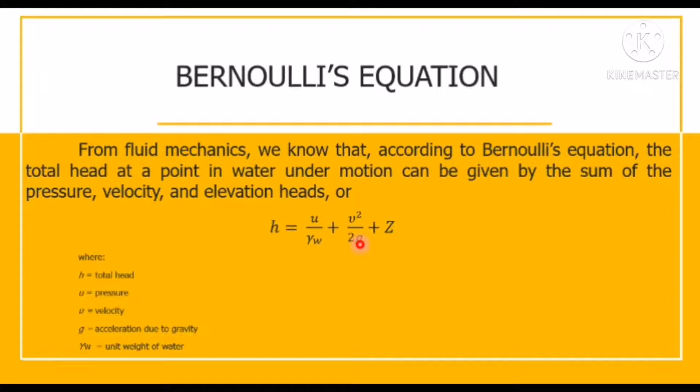This U over unit weight of water is called the pressure head. V squared over 2G here is equal to the velocity head, and Z is the elevation head.

If Bernoulli's equation is applied to the flow of water through a porous soil medium, the term containing the velocity head can be neglected because the seepage velocity is small, and the total head at any point can be adequately represented by H equals U over unit weight of water plus Z, or the elevation head, because the velocity head was already neglected in the equation.

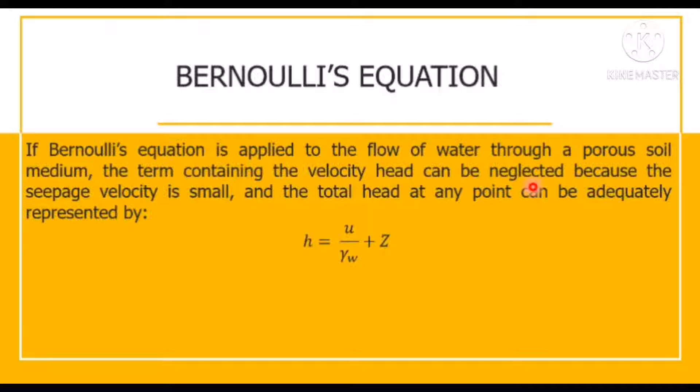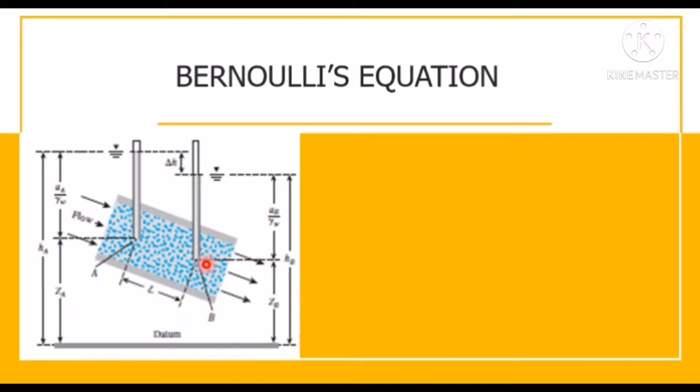In order for us to understand more about Bernoulli's equation, here is an illustration about two points wherein there's a flow of water, and the loss between two points A and B can be given by change in H equals H sub A minus H sub B. So the difference between this water level here and the water level at point B is equal to change in H.

This has elevation HA and HB. That's why the difference between HA and HB is equal to the change in H, or it is also equal to the pressure head at point A plus the elevation head at point A, minus the quantity of the pressure head at point B plus the elevation head at point B.

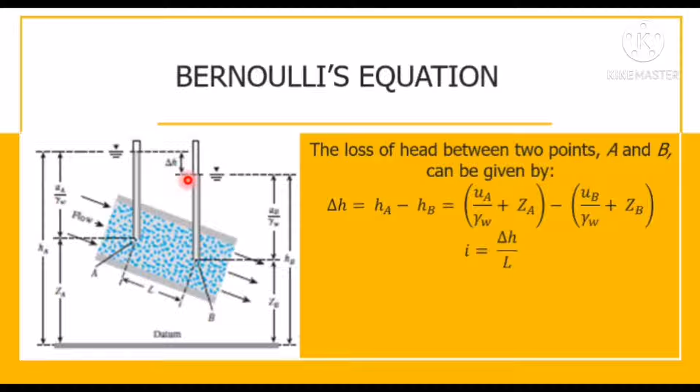This Bernoulli's equation also introduced the concept of what we call the hydraulic gradient. So hydraulic gradient, or I, is equal to change in H, or the change in elevation of two water levels, all over the length, or the soil length between points A and B. That is the distance between points A and B, the length of flow over which the loss of head occurred, because we are getting the change in H between points A and B, and that would be L.

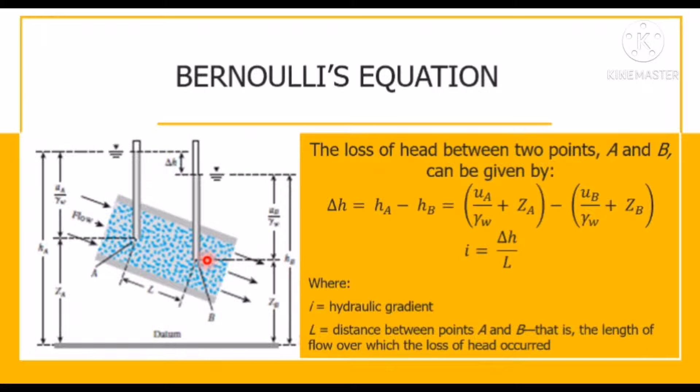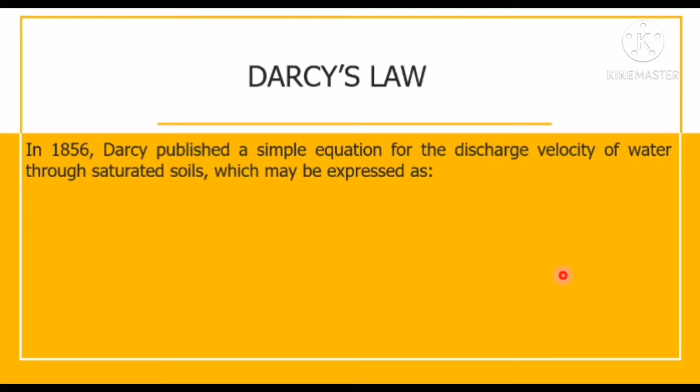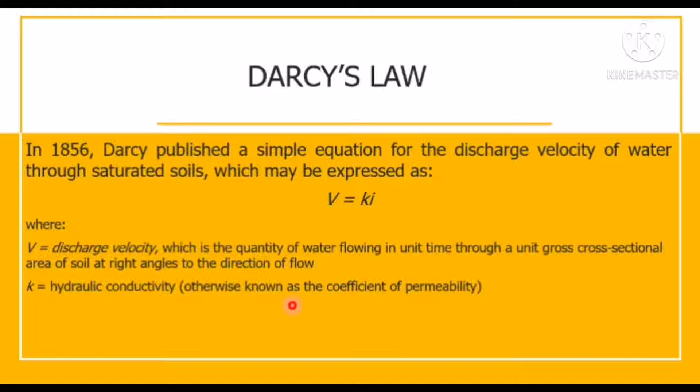The concept of permeability also started from Darcy's law. In 1856, Darcy published a simple equation for the discharge velocity of water through saturated soils, which may be expressed as V equals Ki, where V is the discharge velocity, which is the quantity of water flowing in unit time through a unit gross cross-sectional area of soil at right angles to the direction of flow. K is what we call the hydraulic conductivity, or otherwise known as the coefficient of permeability, and I is what we call the hydraulic gradient, or equal to change in H over L.

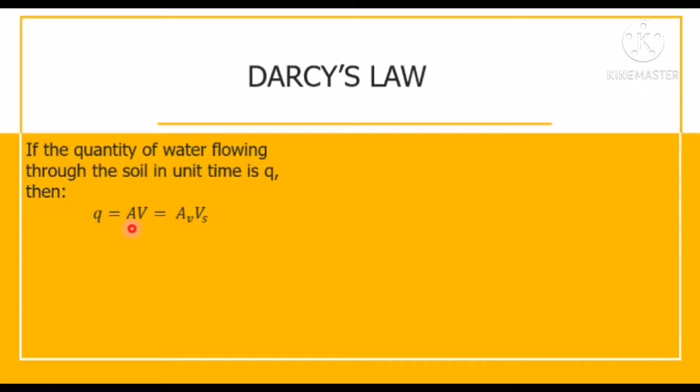If the quantity of water flowing through the soil in unit time is Q, then we know that Q is equal to the area times the velocity, or it is also equal to A times Vs, where Vs is equal to the seepage velocity, and Av is the area of void in the cross-section of the specimen.

Therefore, A is equal to Av plus As. We know that the total area of soil is equal to the area of voids plus the total area of soil particles, or soil solids. If we substitute it in the equation Q equals AV, we substitute the value of A, it will be equal to V multiplied by the quantity Av plus As, equals Av times Vs. So in this equation, we substituted the value of A, and that's why it became like this.

And then, if we transpose the values and get the value of Vs or the seepage velocity, it will be equal to velocity or the discharge velocity multiplied by area of the voids plus area of soil solids, all over area of voids. And if we multiply both numerator and denominator by the length of the soil, it will be equal to the volume, because area times length is equal to volume. So Vs will be equal to V times the volume of voids plus volume of soil solids, all over volume of voids.

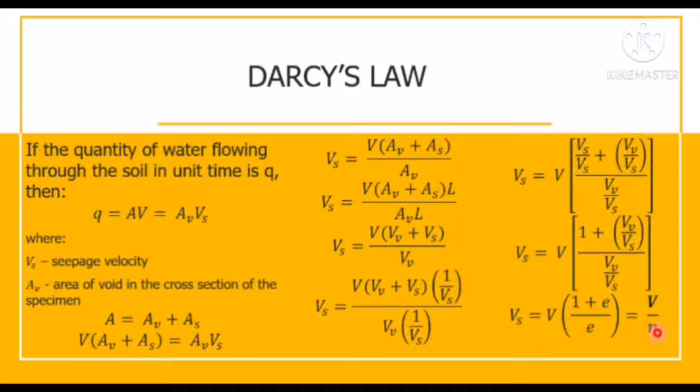In permeability, we have what we call the hydraulic conductivity. In order for us to understand more about permeability, we should know more about hydraulic conductivity, or what we call the coefficient of permeability. Hydraulic conductivity is generally expressed in centimeters per second, or meter per second in SI units. Hydraulic conductivity of soils depends on several factors.

Number one, it depends on fluid viscosity. Why? Because the more viscous the fluid, the harder it is for it to flow through soils.

Also, number two, pore size distribution. The larger the pore size, the easier it is for water to flow through soils. The smaller the pore sizes of the soil, the slower the water will flow through it.

And also, number three, grain size distribution. Why is it a factor that affects the hydraulic conductivity of soils? If we compare gravel to clay, and let water flow through them, the water flows faster in gravel than in clay, because the larger the grain sizes, the larger also the spaces between its particles. That's why water flows faster through gravel than through clay, whose particles are very small, compacted, and stuck together, so the spaces between them are small. So the water flows slower through clay.

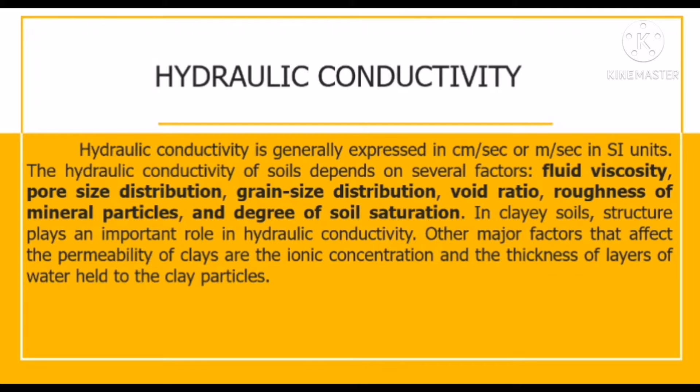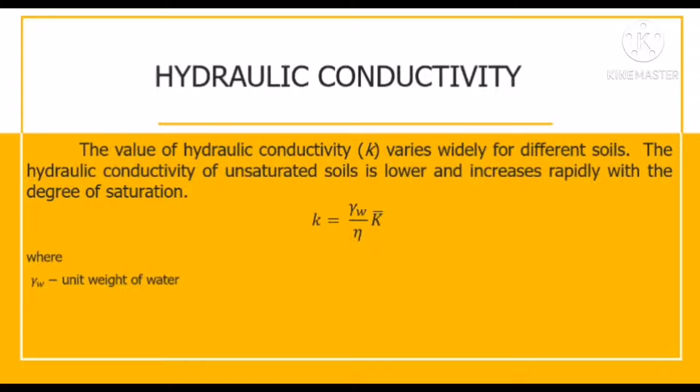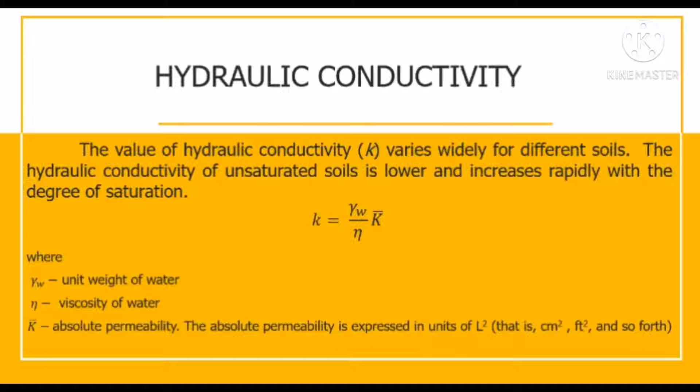The value of hydraulic conductivity varies widely for different soils. The hydraulic conductivity of unsaturated soils is lower and increases rapidly with the degree of saturation, as I said earlier. K is equal to the unit weight of water, gamma sub W, divided by eta, multiplied by K bar, where gamma sub W is the unit weight of water, eta is the viscosity of water, and K bar is the absolute permeability, expressed in L squared, or centimeter squared, feet squared, and so on.

Hydraulic conductivity differs depending on the type of soil. This is a table representing the typical values of hydraulic conductivity of saturated soils, where the range of hydraulic conductivity or coefficient of permeability depends on the type of soil. If the soil type is clean gravel, the coefficient of permeability is definitely higher, ranging from 1 to 100 centimeters per second.

If it's coarse sand, it's about 0.01 to 1.0 centimeter per second. Fine sand ranges from 0.001 to 0.01 centimeter per second. If it's silty clay, it's about 0.00001 to 0.001 centimeter per second, and if it's clay, it's less than 0.000001 centimeter per second.

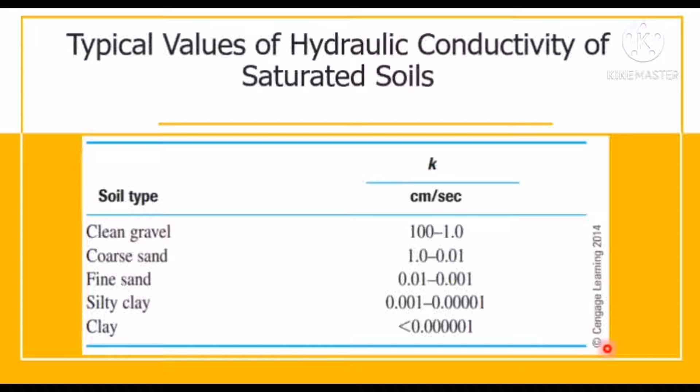In order for us to determine the coefficient of permeability, there are tests in the laboratory. The number one test is what we call the constant head test.

In this type of laboratory setup, the water supply at the inlet is adjusted in such a way that the difference of head between the inlet and the outlet remains constant during the test period.

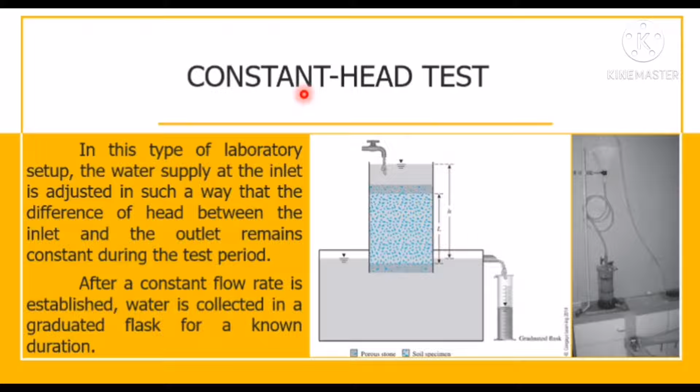Constant head test is generally used for coarse-grained soils like sand and gravel.

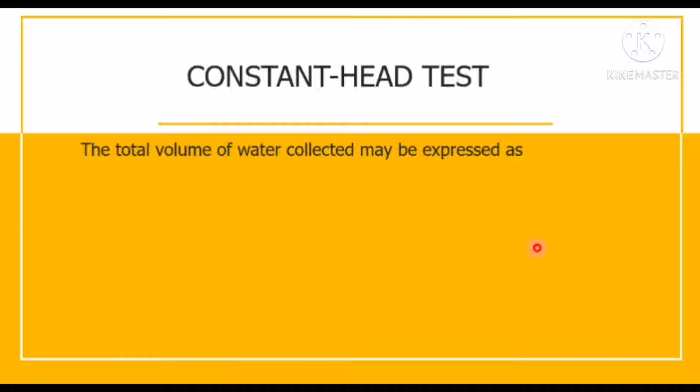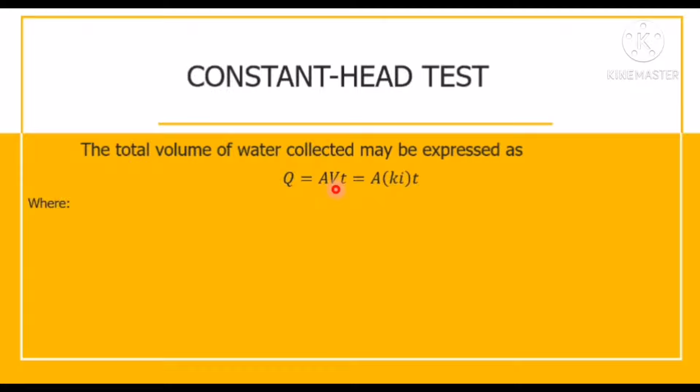The total volume of water collected may be expressed as Q equals A times V times T, area multiplied by velocity times time, where we substitute the value of V, the discharge velocity, as Ki. So Q is the volume of water collected, A is the area of cross-section of the soil specimen, and T is the duration of water collection.

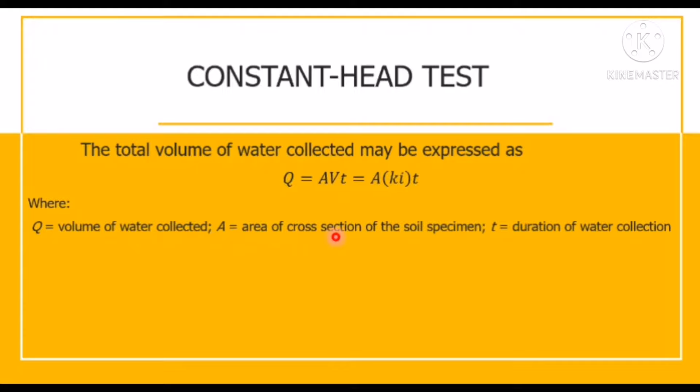So we need to get the time, how long it takes to collect the total volume of water that we need. In constant head test, we have to determine the hydraulic gradient, and we know that hydraulic gradient is equal to H over L.

Q equals A times Ki times time, and if we substitute the value of I in the equation, this becomes Q equals A multiplied by K, H over L, times T. We have to get K from the laboratory test, that's why we need the value of K.

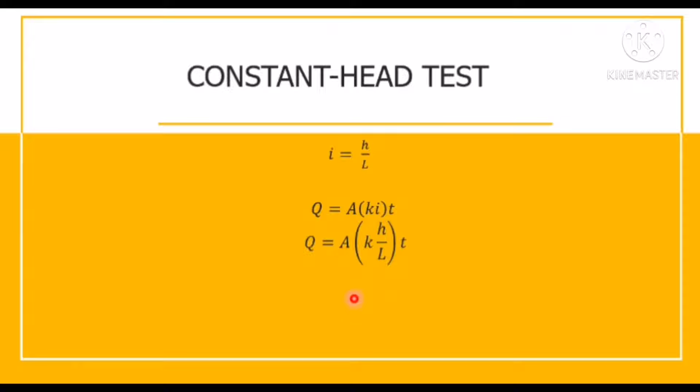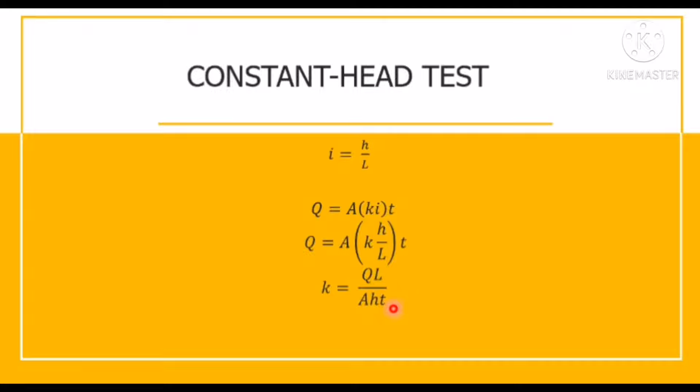K is equal to Q, the discharge, multiplied by the length of the soil sample, all over A, the area, multiplied by H, the difference between water levels, multiplied by the time of water collection. We also have another test, the falling head test.

As mentioned, the constant head test is used for coarse-grained soil, while the falling head test is used for fine-grained soils like silt and clay.

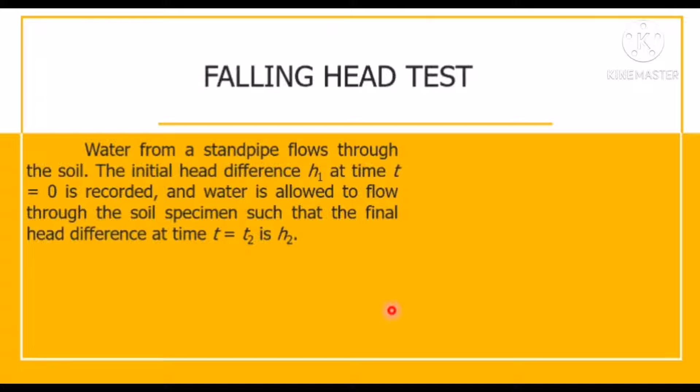Water from a standpipe flows through the soil. The initial head difference H1 at time t equals 0 is recorded, and water is allowed to flow through the soil specimen such that the final head difference at time t equals t2 is H2. This is an example of a falling head test.

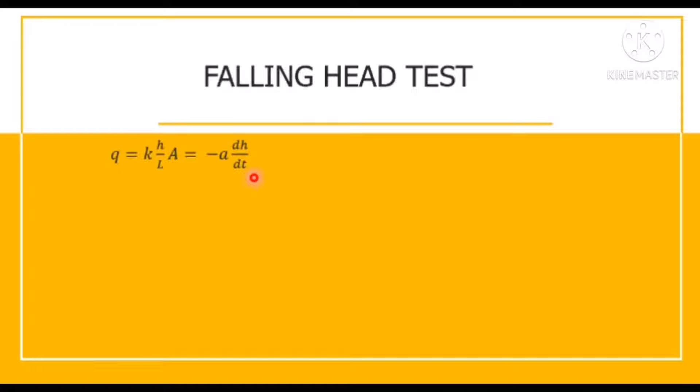We have to apply the concept of calculus here. Q is equal to flow rate, A is area, or cross-sectional area of the standpipe, while the area of the soil specimen is also denoted as A.

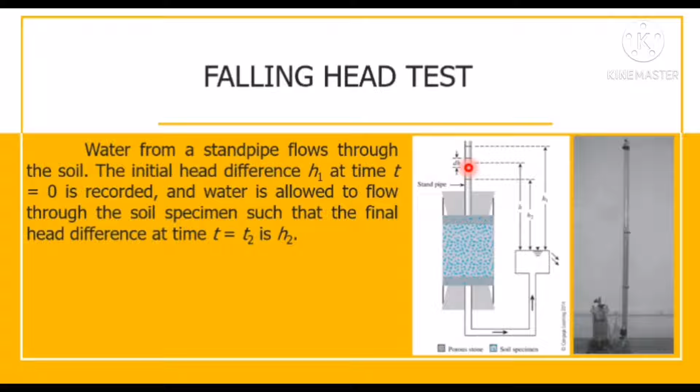That's because we have to apply the concept of calculus here. From that equation, dt will be equal to aL over AK multiplied by negative dH over H.

We just transposed the values here, and this is what came out. We rearranged the equations.

So we have to get the integral of this one. This will be negative ln of H, from H1 to H2. And the integral of dt from 0 to t is t. So that's why t is equal to AL over AK multiplied by negative ln of H sub 2 minus negative ln of H sub 1.

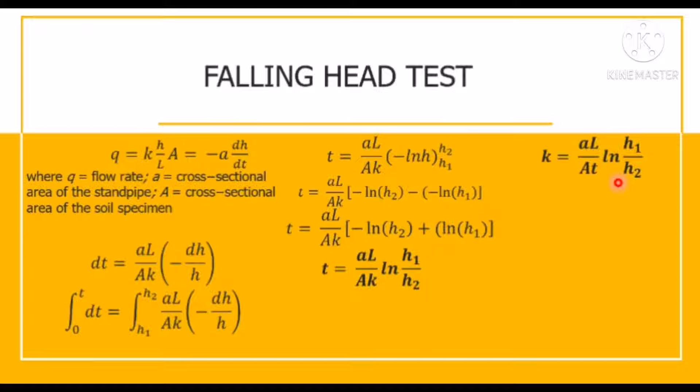And we already know the time here. That's why if we rearrange the equation and we have to get the permeability, coefficient of permeability or hydraulic conductivity, this will be equal to K is equal to AL over AT ln of H1 over H2. Or if we use logarithmic function, this will be equal to 2.303 AL over AT logarithm of H1 over H2.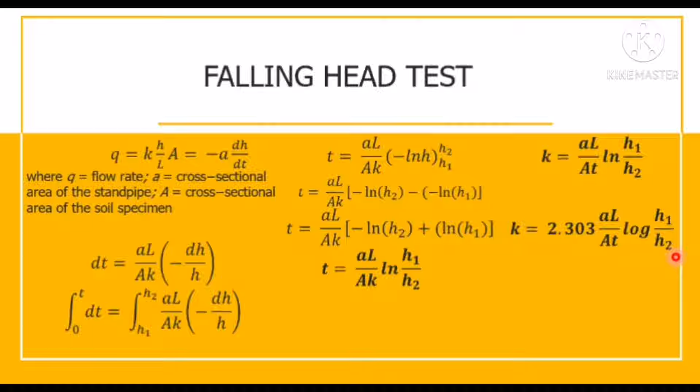So, empirical correlations for hydraulic conductivity. There are scientists or soil mechanics enthusiasts who experimented on hydraulic conductivity and found that there are ranges, since they have different formulas regarding K. Some of them used the falling head test and for hydraulic conductivity, the constant head test.

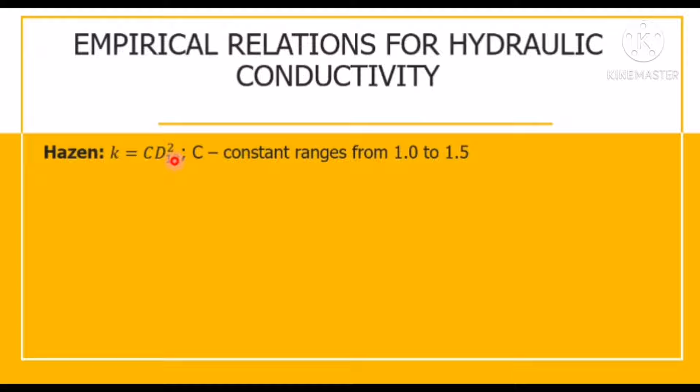So, according to Hazen, K is equal to C D10 squared, where D10 is the effective diameter, the diameter at 10% passing. According to Casagrande, K is equal to 1.4 E squared multiplied by K sub 0.85, where K sub 0.85 is the corresponding value at a void ratio of 0.85.

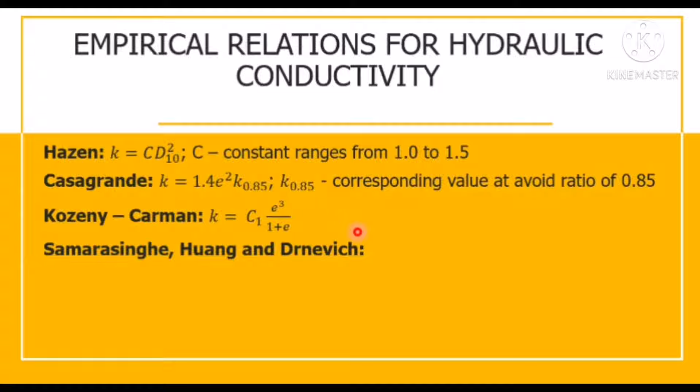Kozeny-Carman: K is equal to C sub 1 multiplied by E cubed over 1 plus E, where E is equal to the void ratio and C sub 1 is constant. And according to Samarasinghe, Huang, and Drnevich, for normally consolidated clays, K is equal to C sub 3, E raised to N over 1 plus E, where C and N are constants and E is the void ratio of the soil.

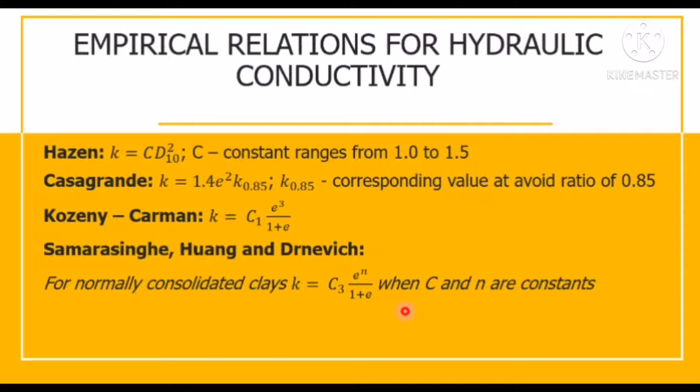So, to further understand more about permeability, we also have to know the equivalent hydraulic conductivity in stratified soil. Because soil in an area is not uniform, the types are not the same. So, for example, the soil profile would look like this: silty sand, clayey silt, silty clay, and then clay.

So, if we consider this soil profile, depending on the type of soil, the hydraulic conductivity or coefficient of permeability will differ. That's why we have what is called equivalent hydraulic conductivity. So, for example, this is a soil profile, and our direction of flow is along the soil. This will be horizontal, so we get the horizontal hydraulic conductivity.

So, the horizontal equivalent hydraulic conductivity is equal to 1 over H multiplied by K1, the KH of the first soil, multiplied by its height, plus KH2 multiplied by H2, and then the coefficient of permeability of the third layer multiplied by the height of that layer, and so on up to n layers. So remember, when it's parallel to the soil and the direction, that would be horizontal flow.

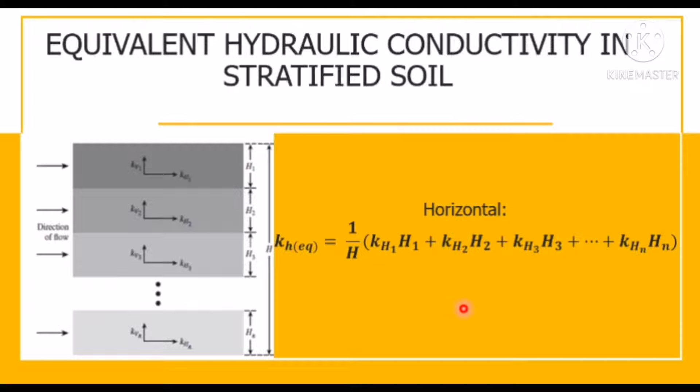And that's why we came up with the vertical. So by vertical, per layer of soil, muna yung adaanan ng ating lupa, nung tubig. So per layer.

Pag sa horizontal, pag ganyan. Halimbawa, pag ganyan siya again, let's draw again. So pag ganyan siya, ay baliktad. Sorry, let's erase first. So pag ganyan siya, ito yung layers ng lupa natin. And the direction of the soil, of the water is pag ganito. So this will still be vertical kasi per layer yung daan ng ating tubig.

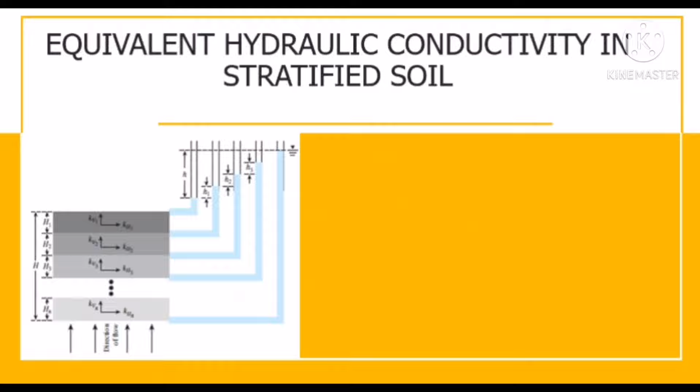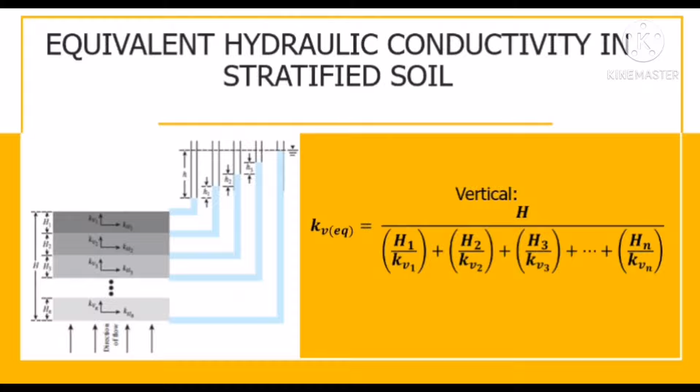So per layer, that will be equal to the vertical coefficient of hydraulic conductivity. That will be equal to H, the total height of the soil, all over H1 over the vertical hydraulic conductivity of the first layer, plus H2, the height of the second layer, all over the vertical hydraulic conductivity of the second layer, plus H3 over KV3 plus HN over KVN. So for the nth layer of soil.

So pag kasi tayo, halimbawa, ito yung lupa natin. Lagyan natin ng pipe dito. Ang mangyayari dyan, yung tubig natin, di ba mababa? Parang nag-swirl-swirl yan, kaya nagkakaroon tayo ng tinatawag na drawdown. So ito yung drawdown, yung pagbaba ng tubig dito. Dito mababa yan, pag ganyan hindi siya. As in, mababa agad ng diretsong babang ganun. So pag ganyan siya, mababa.

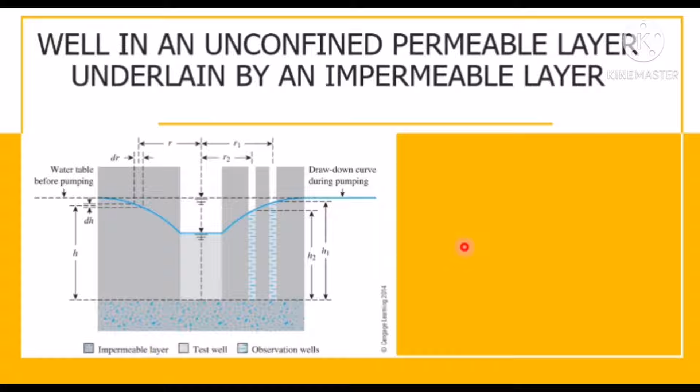minus the drawdown here. That's why K in unconfined aquifer is equal to Q, the discharge, ln of R1, the distance from the center to the first observation point, all over R2, the distance from the center to the second observation point, all over pi multiplied by h sub 2 squared. So h sub 2 squared is here. And I'm sorry, that should be h sub 1 squared minus h2 squared here, mas malaking value dapat nito, all over 2.

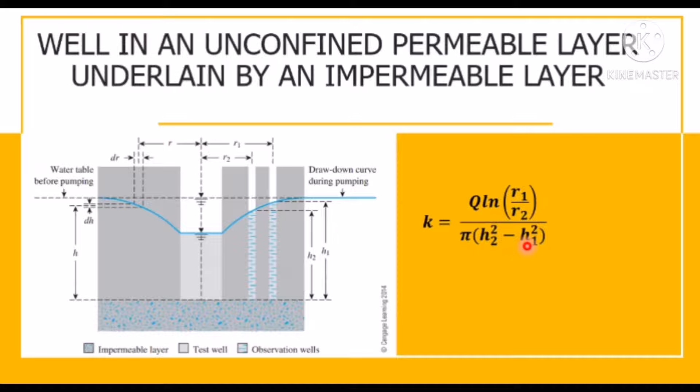And well in a confined aquifer underlain by an impermeable stratum. So pag naman confined aquifer, it will be equal to Q ln of R1 over R2, all over 2 pi T times, that should be H1 minus H2. H1 ito, yung mas malaking value, minus H2. But still, this will be R1 over R2.

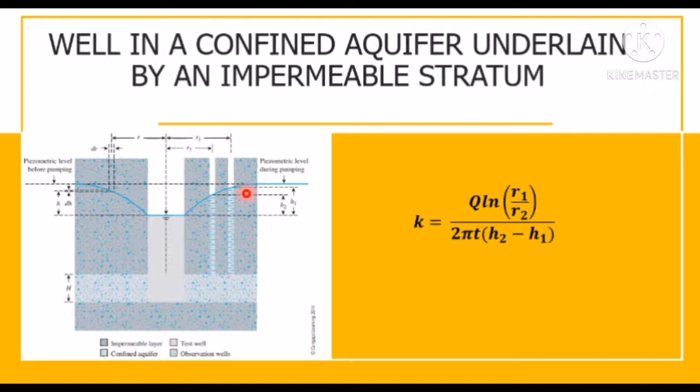So we also have the concept of transmissibility or transmissivity and hydraulic conductivity or permeability. Transmissibility is the ability of an aquifer to transmit water through its entire thickness. It is most simply defined as the effective hydraulic conductivity of an aquifer multiplied by the thickness. And T is equal to KH.

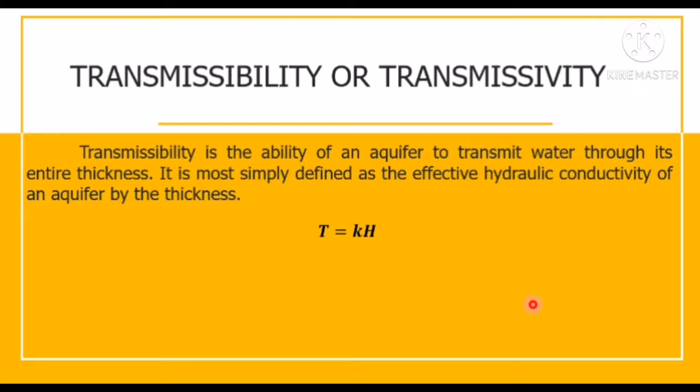So to further understand the topic, let us first solve problems regarding the topic. Sample problem number 1.

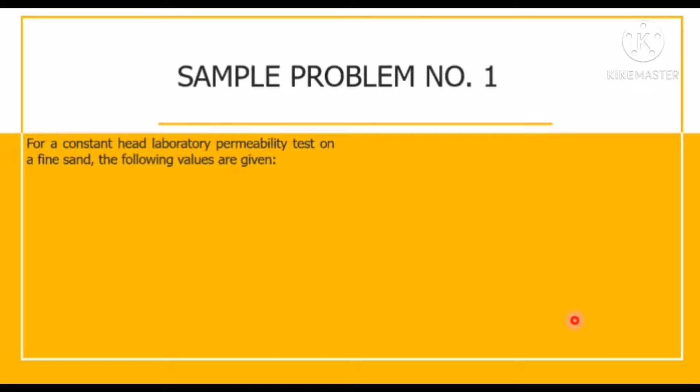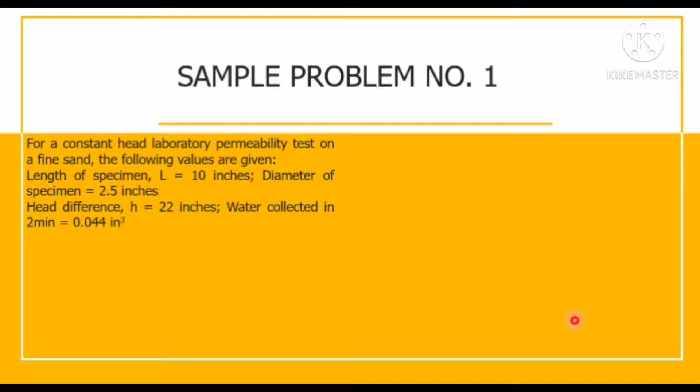For a constant head laboratory permeability test on a fine sand, the following values are given: length of specimen L is equal to 10 inches, diameter of specimen equals 2.5 inches, head difference is equal to 22 inches, water collected in 2 minutes is equal to 0.044 cubic inch. So if you look at the problem, it says fine sand.

So it doesn't mean that just because it says it's fine, dapat falling head. But it's still sand, it's still coarse grained soil. So that's why we used constant head laboratory permeability test.

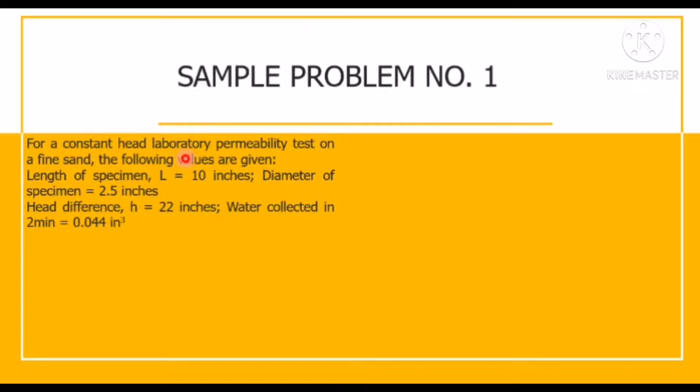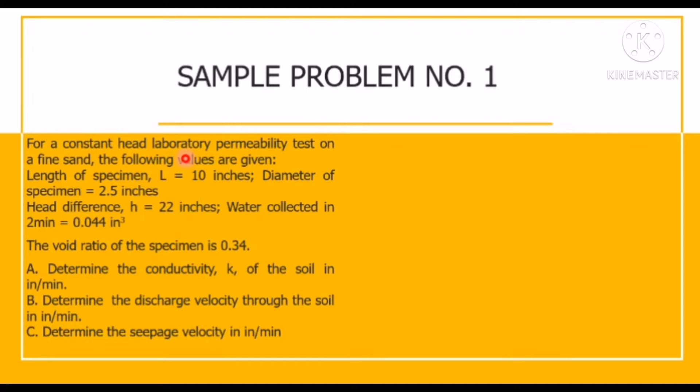So the void ratio of the specimen is 0.34. So we have to determine the conductivity K of the soil in inch per minute, and the discharge velocity V through the soil in inch per minute, and the seepage velocity or Vs in inch per minute. So how are we going to solve the problem?

Solution: K is equal to QL over AHT. Given, the water collected in 2 minutes is 0.044 cubic inch, that's why this will be Q, multiplied by 10 inches, the length of the specimen is 10, all over the area of the specimen, which has a diameter of 2.5 inches. So this will be pi over 4 multiplied by 2.5 squared.

And then we multiply it to 22, the head difference, multiplied by the time, which is 2 minutes. And we get the answer: K will be equal to 2.037 times 10 raised to negative 3 inch per minute.

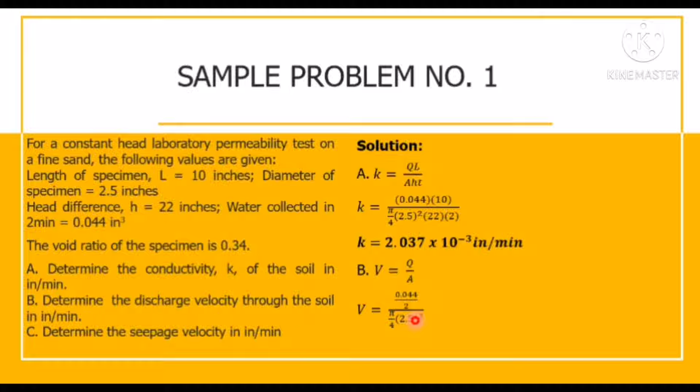In letter B, we have to determine the discharge velocity or V. We know that V is equal to Q over A, from the first formula, from the concept of Darcy. If we substitute here, Q should be in cubic inch per minute. So that's why 0.044 over 2 all over pi over 4 times 2.5 squared. This will be equal to 4.818 times 10 raised to negative 3 inch per minute.

So why is it that here Q is in cubic inch per minute, but there it's just cubic inch? This is because it could also be V times L over V, A, H, T — it should really be V, the volume, not velocity. But the authors introduced it as Q. Q can be discharge in cubic inch or cubic meter, or cubic meter per second or cubic inch per minute or per second, depending on what's given. So it can be volume over time or just volume. For us to get the velocity, Q here should be in volume over time, that's why it should be volume. But the authors use Q as discharge, because V here we denote as discharge velocity — if we also made this V, there would be two. That's why it's Q. If the given Q is already in cubic inch per minute, you don't need to divide it by time anymore; it's just equal to Q L over A H. Understand? If you have questions, you can ask me personally.

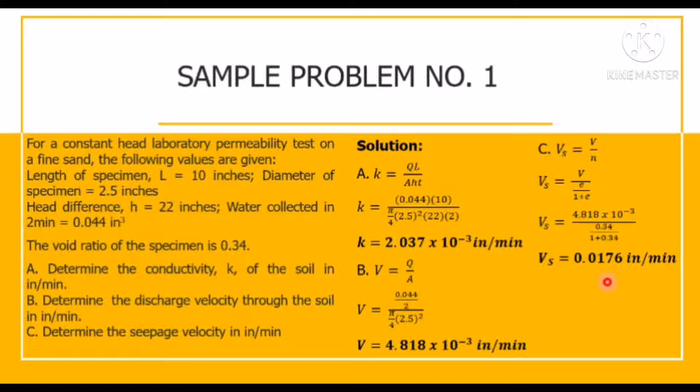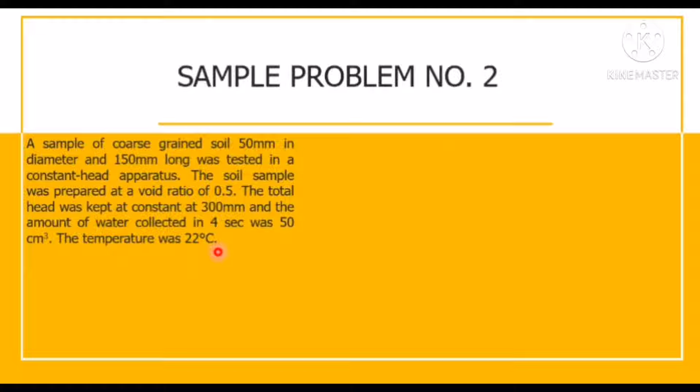Next problem. A sample of coarse-grained soil, 50 mm in diameter and 150 mm long, was tested in a constant head apparatus. The soil sample was prepared at a void ratio of 0.5 and the total head was kept constant at 300 mm, and the amount of water collected in 4 seconds was 50 cubic centimeters. The temperature was 22 degrees Celsius. We have to compute the temperature correction factor and the corrected coefficient of permeability in centimeters per second, and the interstitial velocity, or what we call the seepage velocity.

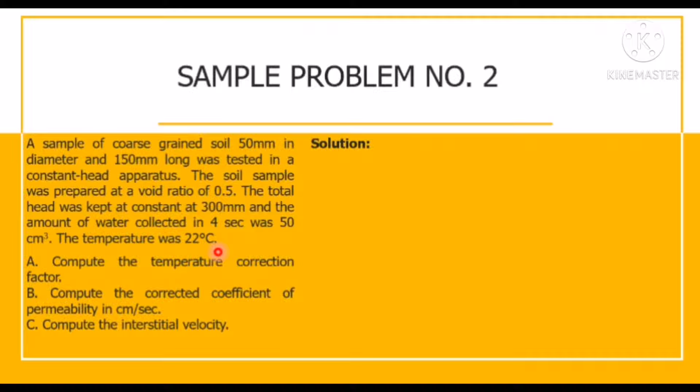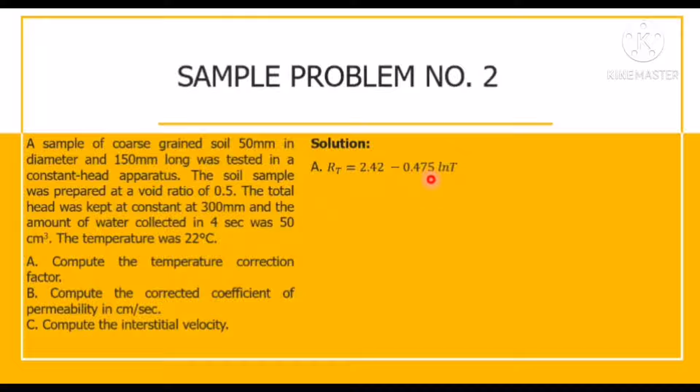So why do we need the temperature correction factor and corrected coefficient of permeability in centimeters per second? Because permeability should be measured at 20 degrees Celsius. So when the temperature of the water is not 20 degrees Celsius, we have to adjust — we get the temperature correction factor. The formula is 2.42 minus 0.475 ln of T, the temperature. Substituting: 2.42 minus 0.475 ln of 22 degrees Celsius. The temperature correction factor will be equal to 0.95.

Then we have to get the corrected coefficient of permeability in centimeters per second. Letter B is equal to Ki, A, so Ki A or V, A, V is in terms of Ki here. We know that Q is equal to volume over time, which is 50 over 4 — the volume is 50 cubic centimeters in 4 seconds. We get Q in cubic centimeter per second, that's 12.5 cubic centimeter per second. From the equation Q equals Ki A: 12.5 is equal to K, which is unknown, multiplied by 30 over 15. 30 is the total head, 300 mm, but we get it in centimeters so 300 mm is 30 centimeters, and 15 is for 150 mm, so 15 centimeters is 150 mm, multiplied by the area. The diameter given is 50 mm, so it should be 5 centimeters, multiplied by pi over 4 and squared. We get the value of K, which is equal to 0.319 centimeters per second.

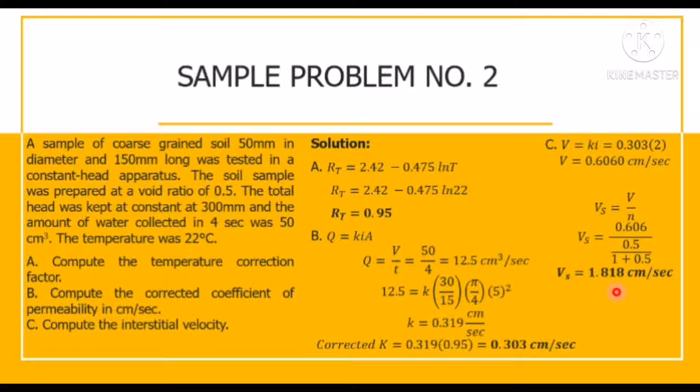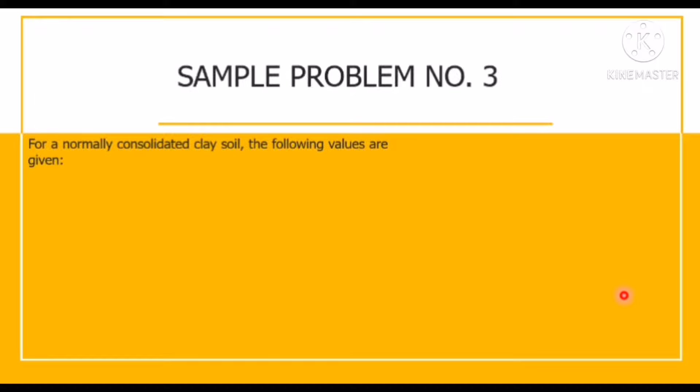Okay, for sample number 3. For a normally consolidated clay soil, the following values are given: void ratio and K in centimeters per second is 1.10 is to 0.302 times 10 raised to negative 7, and 0.9 is to 0.15 times 10 raised to negative 7.

Meaning, if the void ratio of our consolidated clay is 1.10, its hydraulic conductivity is 0.302 times 10 raised to negative 7. If the void ratio is 0.9, its hydraulic conductivity is about 0.15 times 10 raised to negative 7.

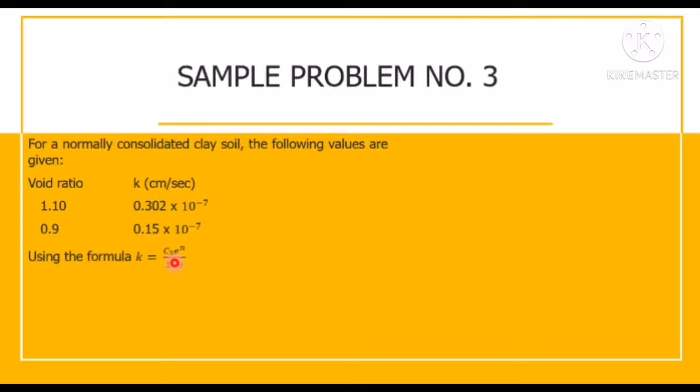Using the formula K is equal to C sub 3, E raised to N over 1 plus E, we have to compute the value of N, the value of C sub 3, and the hydraulic conductivity of clay at a void ratio of 0.75. So the equation is K equals C multiplied by E raised to N over 1 plus E. That is the equation. How are we going to compute for N here?

Our given is only K. So if we compute, for example, this first pair, the unknowns are C and N. But if we get the ratio between the two, K1 over K2, the constant C will cancel out, leaving only N.

Given the K values with their corresponding void ratios, we substitute into the formula: 0.302 times 10 raised to negative 7 over 0.12 times 10 raised to negative 7 equals the quantity 1.1 raised to N over 1 plus 1.1, all over 0.9 raised to N over 1 plus 0.9.

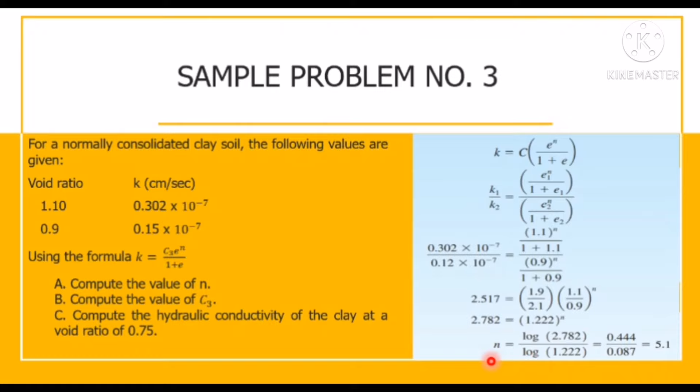This gave us the value 2.517 multiplied by 1.9 over 2.1, quantity 1.1 over 0.9 raised to N, giving us 2.782 equals 1.22 raised to N. So N equals logarithm of 2.782 over logarithm of 1.222, equals 0.44 over 0.087, which gives us the value of N equal to 5.1.

To get C, we just substitute the value using either pair. Let's use the first pair: 0.302 and 1.1. Substituting into the formula K equals C, E raised to N over 1 plus E: 0.302 times 10 raised to negative 7 equals C multiplied by 1.1 raised to N, which is 5.1, over 1 plus 1.1. So we get 1.626 over 2.1 multiplied by the constant, giving us the value of C equal to 0.39 times 10 raised to negative 7.

Then we have to get K at a void ratio of 0.75. We know K equals 0.39 times 10 raised to negative 7 centimeters per second multiplied by E raised to N over 1 plus E. So at a void ratio of 0.75, K equals 0.39 times 10 raised to negative 7, the constant, multiplied by the void ratio 0.75 raised to N, which is 5.1, over 1 plus 0.75. We get the hydraulic conductivity of the soil at a void ratio of 0.75 equal to 0.514 times 10 raised to negative 8 centimeters per second.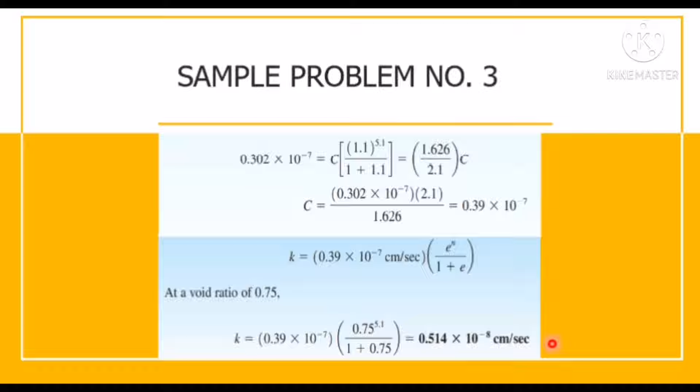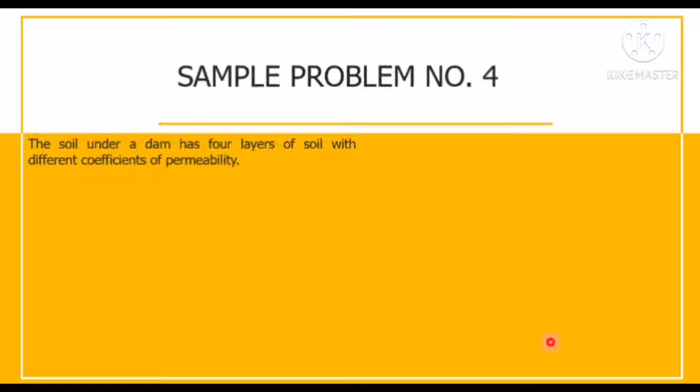Next problem is for 4 layers of soil with different coefficients of permeability. Say we have layers 1, 2, 3, 4, with corresponding depth and coefficient of permeability.

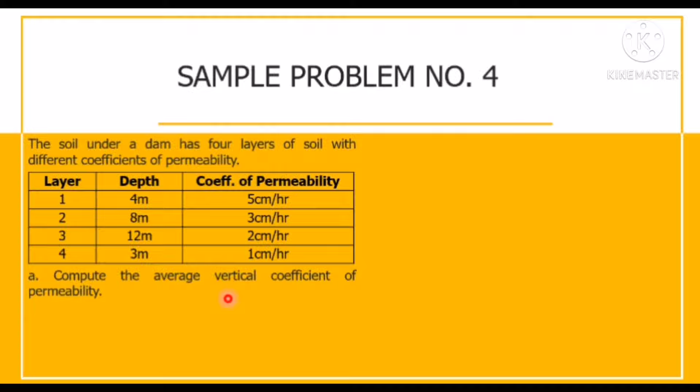We have to compute for the vertical coefficient of permeability and the interstitial velocity of water moving through the soil, given a void ratio of 0.60 and hydraulic gradient of 0.0018. We have to express it in centimeter per hour. So for the solution,

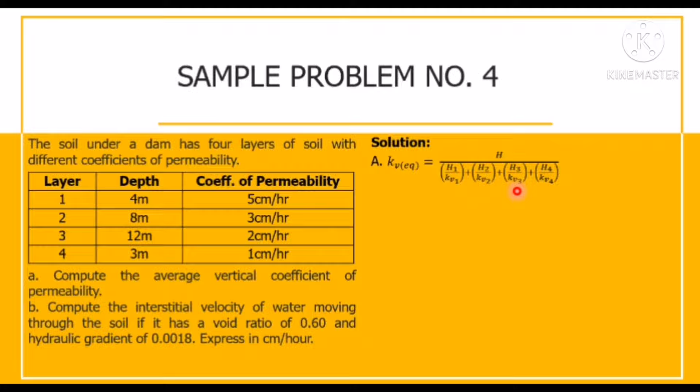the vertical coefficient of permeability is equal to H over (H1 over KV sub 1, plus H2 over KV sub 2, plus H3 over KV sub 3, plus H4 over KV sub 4). So there are 4 layers.

So if we substitute the values, the total height of the soil is 4 plus 8 equals 12, plus 12 is 24, plus 3, this gives 27. And H1 is 4 over 5, the coefficient of permeability of the first layer, plus 8 over 3, plus 12 over 2, plus 3 over 1,

and we get the value of the coefficient of permeability by vertical equivalency equals 2.17 centimeters per hour. And then we have to get the interstitial velocity or the seepage velocity.

We know that V is equal to Ki. K is 2.17 from the previous calculation, multiplied by 0.0018 which is given, equals 3.91 times 10 raised to negative 3 centimeters per hour.

So if we get the value of the seepage velocity, we have the given void ratio. It's equal to V over (E over 1 plus E), or we can raise the 1 plus E here. That will be equal to 3.91 times 10 raised to negative 3 multiplied by 1.60 all over 0.60. Vs is equal to 0.0104 centimeters per hour.

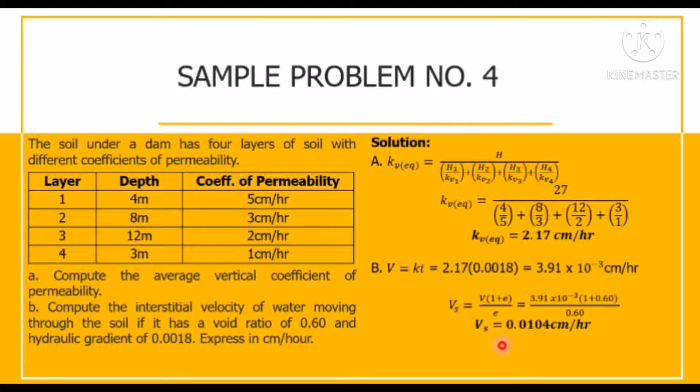Lastly, our last problem for today: an unconfined aquifer penetrates 24 meters below the static water table. After 24 hours of pumping at a constant rate of 87 liters per second, the water table in 2 observation wells located 36 meters and 82 meters from the well showed drawdown of 1.5 meters and 0.63 meters respectively.

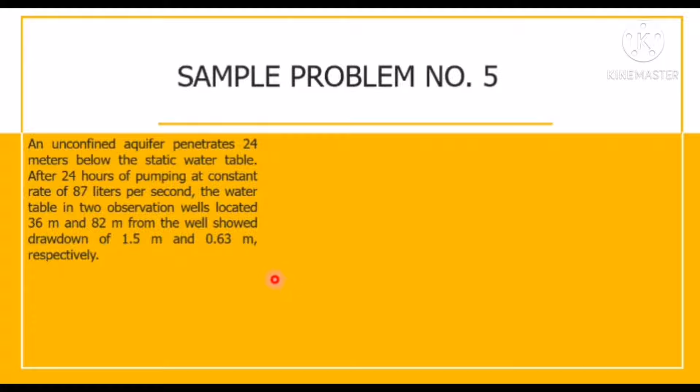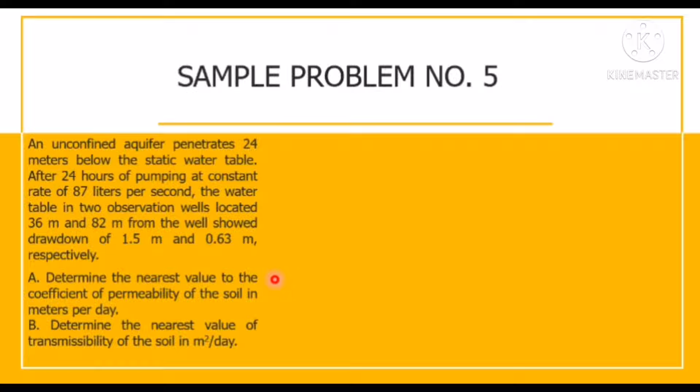So we have to determine the nearest value to the coefficient of permeability of the soil in meters per day, and the nearest value of transmissibility of the soil in square meters per day.

So this is the illustration: a 24-meter aquifer that penetrates 24 meters below the water table and collects 87 liters per second, and the water table in 2 observation wells are respectively 36 meters and 82 meters from the well.

36 meters and 82 meters from the well showed drawdown of 1.5 meters and 0.63 meters respectively.

In order for us to get the value of K, we should first get the value of Q in cubic meters per second, since the given is liters per second. We have to express it in meters per day, so Q needs to be in meters. We just divide by 1,000, since 1,000 liters is equal to 1 cubic meter.

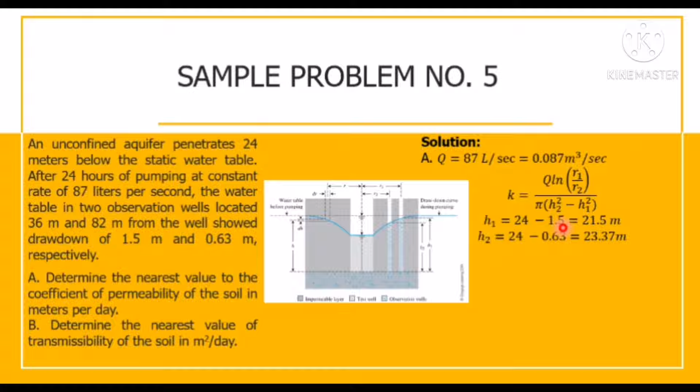So our H1 is 24 minus 1.5 — sorry, the denotation is reversed here, but it's the same — equals 21.5 meters. H sub 2 is equal to 24 minus 0.63 meters, equals 23.37 meters. So the value of H2 is always the larger one.

Since that one is farther than this one, that's why it's set up this way. So: 0.087 times ln(82 over 36) — that's our R1 — over pi times (23.37 squared minus 21.5 squared).

K will be equal to 2.717 times 10 raised to negative 4 meters per second.

And we have to get it in meters per day. So we have to multiply it by 3,600 seconds per hour, multiplied by 24 hours in a day. So we get the value of K, which is equal to

23.474 meters per day. And then lastly, we have to determine the transmissibility of the soil in square meters per day. T is equal to KH,

so K multiplied by the thickness of the soil or height. So 23.474 times 24 meters gives us the value 563.397 square meters per day.